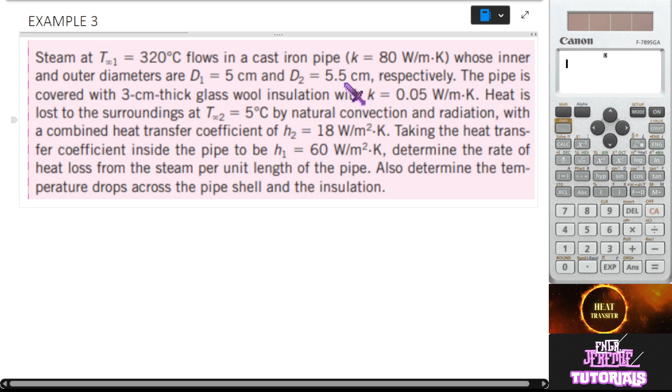So for our solution, syempre, ang unang gagawin natin first is to draw the cast iron pipe with inner diameter of 5 centimeter.

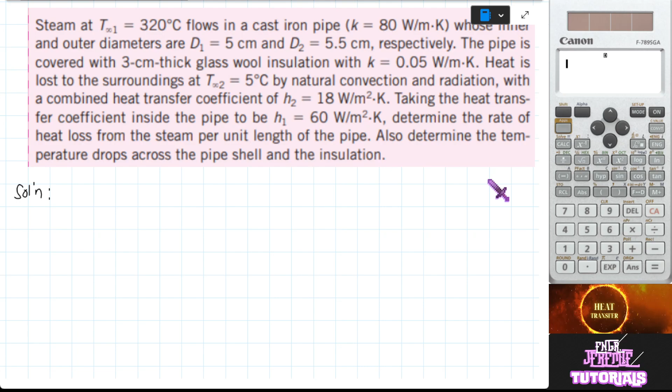Okay, let's draw first a circle. So, example, ito yung inner diameter ng pipe natin.

Now, let's draw again another circle for the outer diameter naman ng pipe, since stated na andyan yung outer diameter. So, example, yan yung outer diameter ng pipe natin.

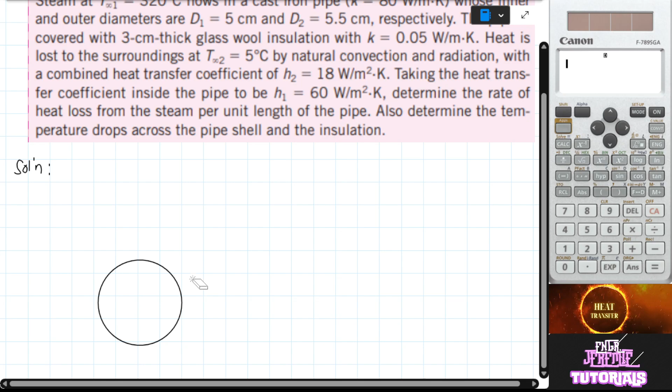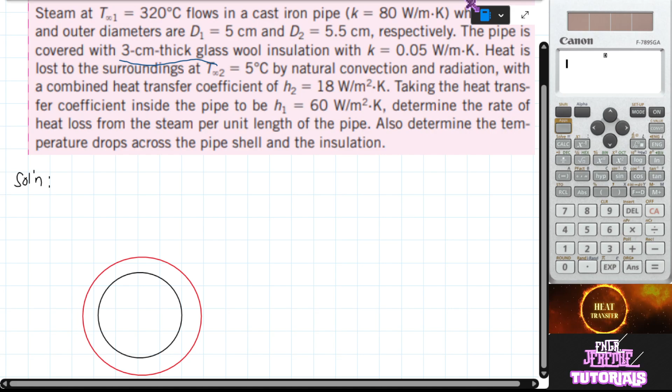Then another, it is covered. Ang sabi dyan, it is covered by the pipe is covered by 3 cm thick glass wool insulation. So yung pipe pala na ito, if ito yung pipe natin, nako-cover pa siya by 3 cm thick na insulation.

So kung ito yung inner diameter natin, itong nasa gitna, so ito yung pipe, ito yung ating insulation, itong nandito. So, from center, okay, isa-isahin natin.

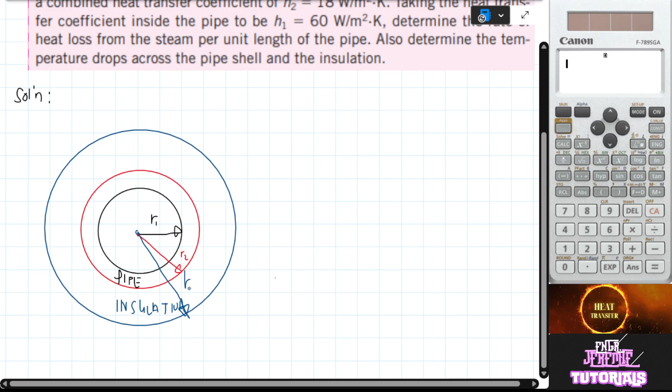Ito yung R1, kulay red yung R2, kulay blue yung ating R3. Okay, so start tayo sa R1.

So given, start tayo sa R1. Kung papansinin nyo, R1 is not given, pero given yung inside diameter ng pipe natin. So kung ito yung pipe, ang inside diameter, syempre ito, mula rito hanggang dito is 5 cm.

Para makuha natin yung R1, yung inside diameter, divide natin by 2, in which yung inside diameter is 5 cm divided by 2, that is 2.5 cm. So convert natin into meter, 1 meter is 100 centimeter. So R1 is equal to 2.5 divided by 100, which is 0.025 meter.

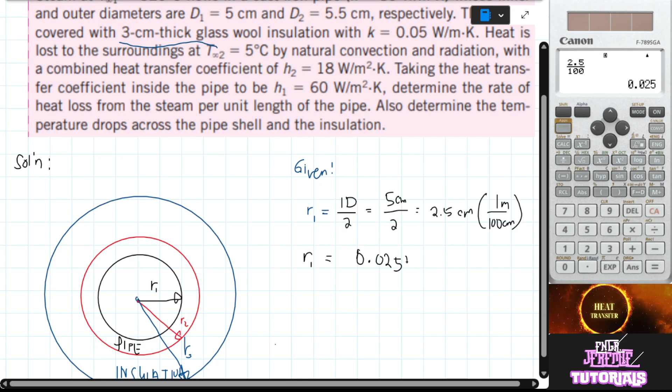0.025 meter. How about the R2? Okay, yung R2 naman, ito. Kung papansinin nyo, yung red dito na circle is our outer diameter ng pipe. Para makuha natin yung R2, yung outer diameter, simply divide natin by 2, yung OD.

Or the outside diameter divided by 2. Outside diameter ng pipe natin is 5.5 centimeter. So 5.5 centimeter divided by 2. I-convert na natin diretso para wala nang masyadong ano, times 1 meter is 100 centimeter. So R2 is equal to, calculator na yan, 5.5 over 2 times 1 over 100, that is 0.0275 meters.

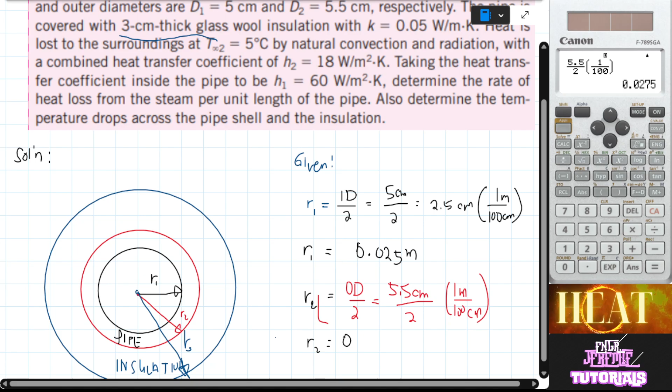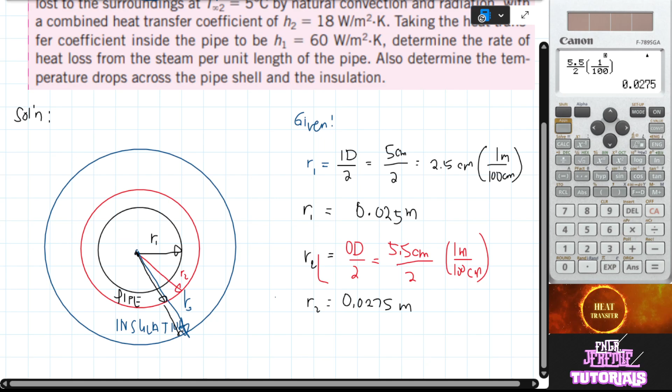0.0275 meters. Now, sa R3, kung papansinin nyo yung R3, mula sa center hanggang dito is R2. So dagdagan natin ng thickness para makuha natin yung R3. To solve for R3, simply yung R2, dagdagan natin ng thickness ng insulation.

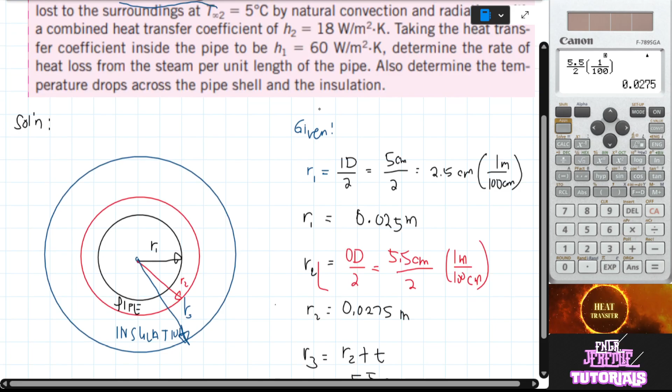Ang R3 natin is, gamitin natin yung naka-cm, 5.5 cm over 2 plus yung thickness ng insulation natin which is 3 cm thick insulation. So R3 is equal to 5.5 over 2 plus yung 3 cm na insulation. Tapos i-convert natin, magiging 23 over 4 cm, times convert natin, 1 meter is to 100 cm.

1 meter is to 100 cm. So for this answer, we divide by 100. Press equal. So, 0.05... 0.0575 meter is our R3. So now we have R1, R2, and R3.

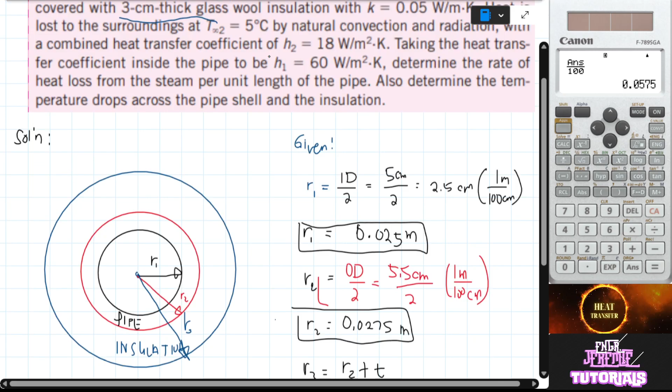So the temperature inside is 320 degrees Celsius. Meanwhile, the temperature outside is... T infinity 2 is 5 degrees Celsius.

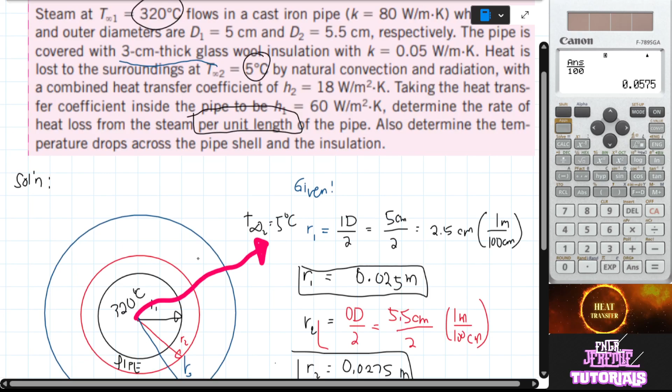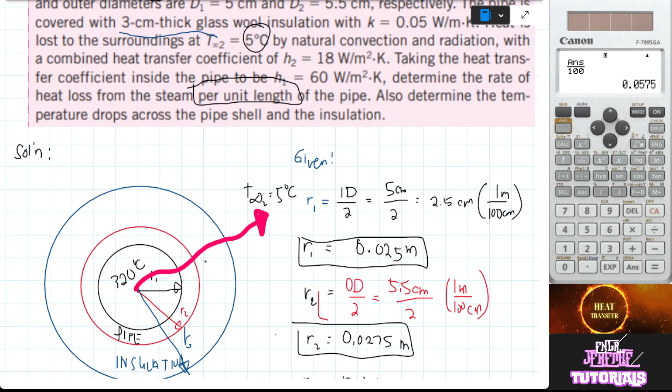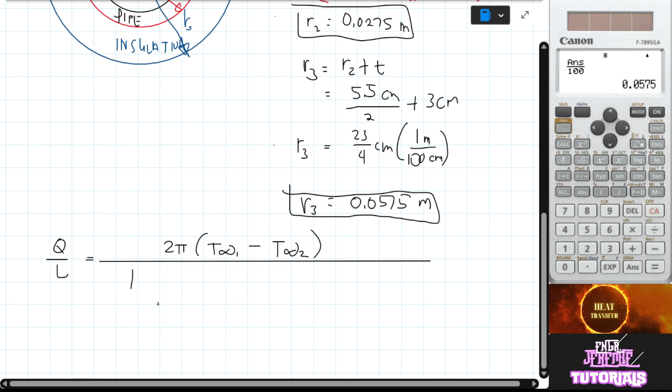Now, if you notice, the convection, or the conduction, there are two. There's conduction here, and conduction here too. So, two conductions, two convections. So what will happen is it becomes 1 over convection 1, or the convection inside, plus ln... let's arrange it. 1 over hi ri plus ln of r2 over r1 over k1. This is already a derived formula.

So if you haven't watched the derivation of this, you may check back the video tutorial on how this formula was derived. Plus ln of R3 over R2, over K2, plus 1 over HO RO.

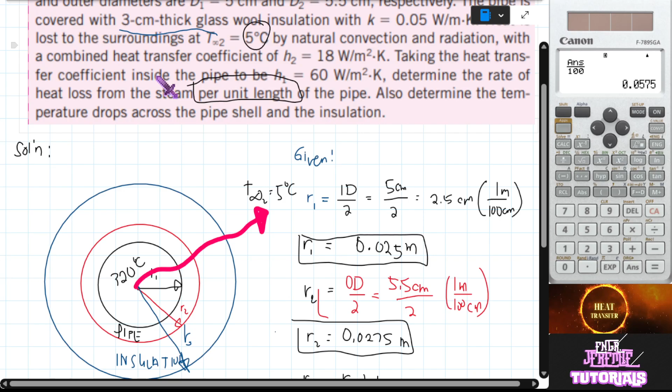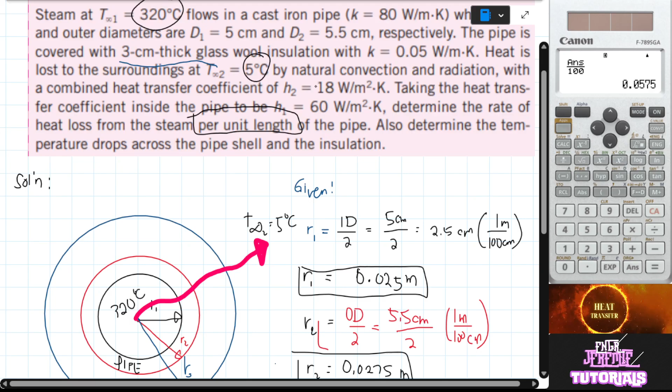Now, we said HI is the H inside the pipe. So taking the heat transfer coefficient inside the pipe to be H1, it is equal to 60. Therefore, H inside is equal to 60 watts per meter squared degree Kelvin. Meanwhile, H outside to the surroundings is 18 watts per meter squared degree Kelvin.

So let's line up everything we have in the formula. We have T infinity 1, T infinity 2, HI already, RI which is the innermost radius, and R2. K1 and K2 are given. So here they are - K1 for the pipe, and K2 for the glass wool insulation is 0.05 watts per meter degree K. And then HO is given too. And RO is the outermost radius.

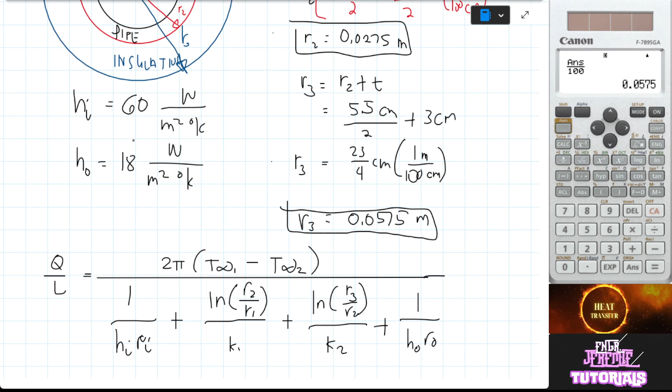Per unit length is now equal to 2 pi times T infinity 1, which is 320, minus the 5 degree T infinity 2, over 1 over H inside. We said HI is 60 watts per meter squared degree Kelvin, times R inside, or the innermost radius, 0.025 meter.

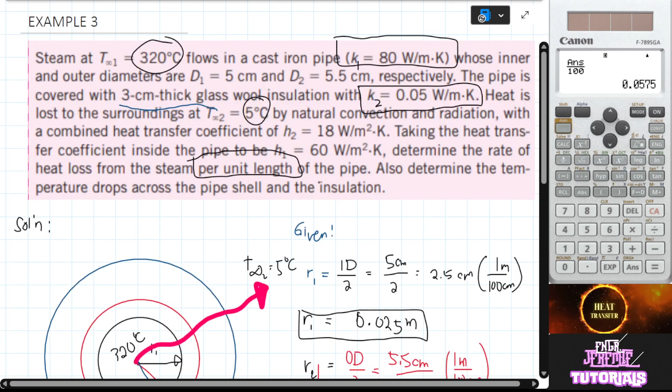Plus the natural log of R2, which is 0.0275, over 0.025 meter which is R1. Over K1, which we said is 80 watts per meter degree Kelvin.

Plus ln of R3, which is 0.0575 meter, over R2, which is 0.0275 meter. Over K2, which is 0.05 watts per meter degree K.

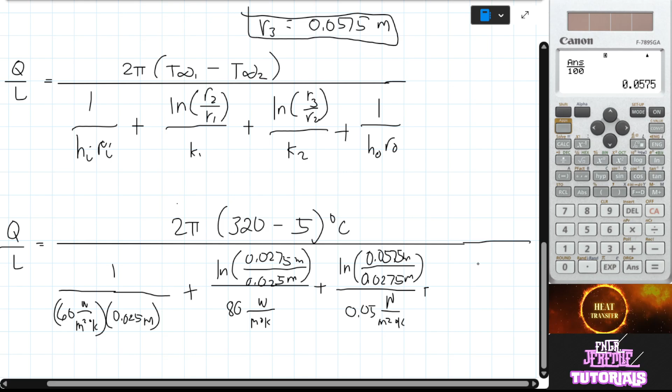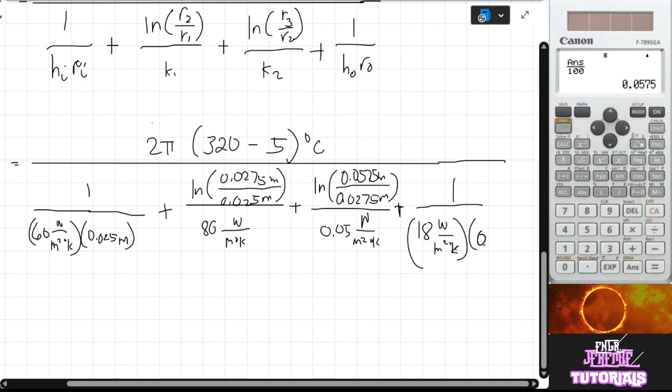Plus, extending it, 1 over HO, 18 watts per meter squared degree K, times outermost radius, which is 0.0575 meter. Okay, let's line this up on the calculator.

And then we store it. So 1 over 60 times 0.025, press equal. We may store it. I'm using a Canon F-789SGA calculator, but storing is almost the same as the Casio 570.

So for storing, press shift. We bring up this STO - press shift, recall, shift, recall. Once STO appears, we may now choose which variable, say example A. So A is what I'll put there. So this value, this part, is already stored in A.

Now let's store this one. Press AC. ln of 0.0275 over 0.025, over our K1 which is 80. Equal. Then we store it again in B. So this is now stored in B.

Then we can now solve. So let's solve our Q over L, simply by taking Q over L equal to 2 pi times 320 minus 5, all over recall A plus recall B plus recall C plus recall D.

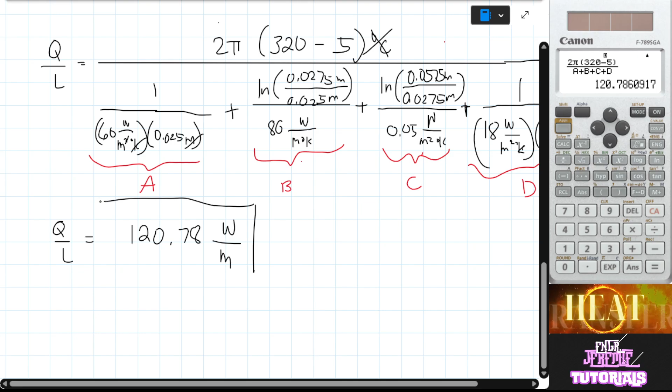Since A, B, C, D are where we stored our values, then press equal, and we get our answer of 120.78 watts per meter. Notice the meter here cancels out, and the Kelvin there cancels out with the temperature difference, the delta, so what remains is watts per meter as our unit. That's how we solve conduction or combined conduction and convection on multiple pipes.